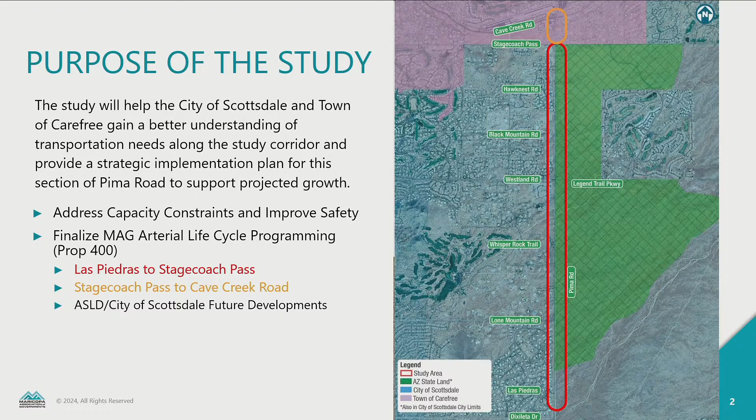Another driving factor on why we're doing this study at the request of the city of Scottsdale and the town of Carefree is that both agencies have MAG Prop 400 Arterial Lifecycle Program funding for this corridor. So with Prop 400 coming to an end, we need to move forward with programming the funds and getting this project constructed.

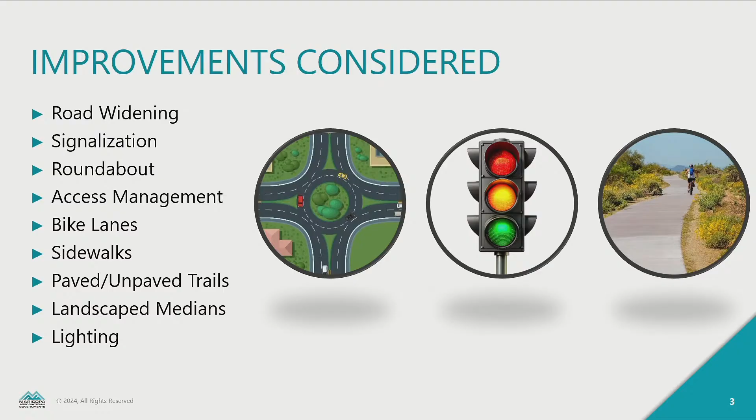So this project looked at a variety of different things. One of them was definitely road widening. Today the road is one lane in each direction, for those of you who are not familiar with this section of Pima Road. We looked at signalizing intersections, also looking at roundabouts, in addition to adding bike lanes, sidewalks, and access management.

As I stated earlier, this is the last section of Pima Road to be studied or widened. As you can see down by the Loop 101, it's a 6-lane arterial with a median today, and as you go further to the north, it transitions to a 4-lane arterial with median. I'll let out the surprise: one of our recommendations is to continue with that trend and propose a 4-lane arterial with median.

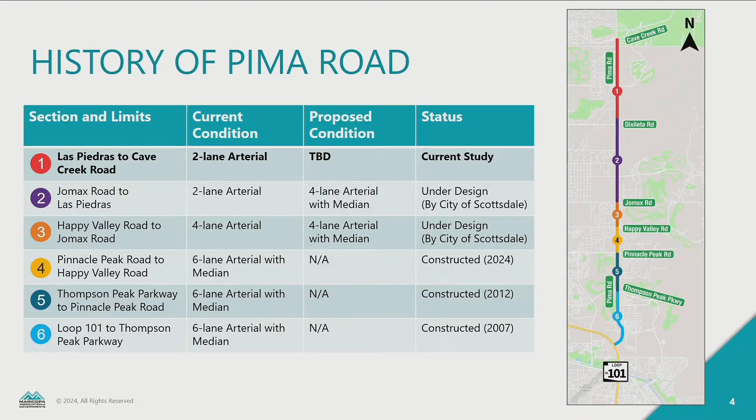So safety is a focus of ours on this study. We heard this from the town of Carefree and the city of Scottsdale. There were over 70 crashes in a 5-year period along this section of roadway. 57% of the accidents occurred between Stagecoach Pass and Cave Creek Road at the end of the line, and that's how I like to talk about this part of Pima Road.

This corridor has variable speed limits, as high as 50 miles an hour, all the way down to 35 miles an hour. The further north you go, the speed slowly starts to drop and decrease, and I think this is one of the reasons why we're having accidents in this location. Plus it's a 2-lane road, and there's not a lot of street lighting in the area.

And so I think we've seen a lot of accidents occurring, especially angled and rear end accidents. Unfortunately, we did have a traffic fatality at Cave Creek Road and Pima. So one of our objectives of this study was to slow traffic down as Pima Road comes to the end of the line at the north.

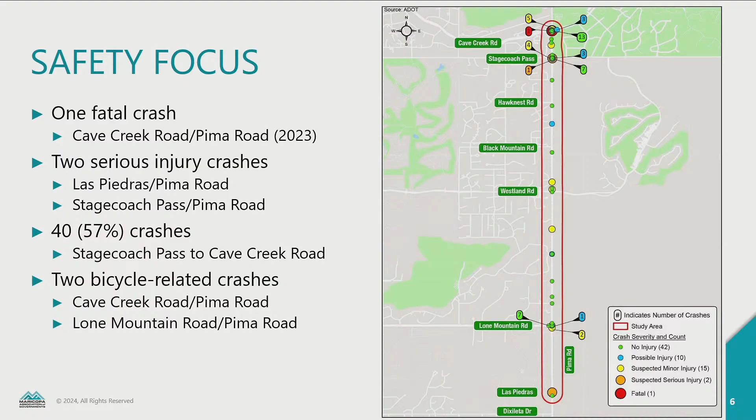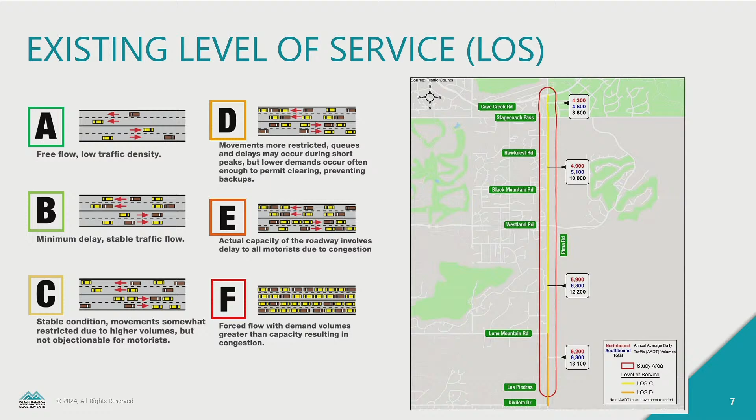So currently today, the roadway is a 2-lane road, 1 lane each direction. It's actually operating at level of service C and D right now, which is pretty fantastic. But as we move into the future, in the year 2035, the corridor starts to fail with all the anticipated growth that's supposed to occur in this area. And by 2050, everything operates at level of service F.

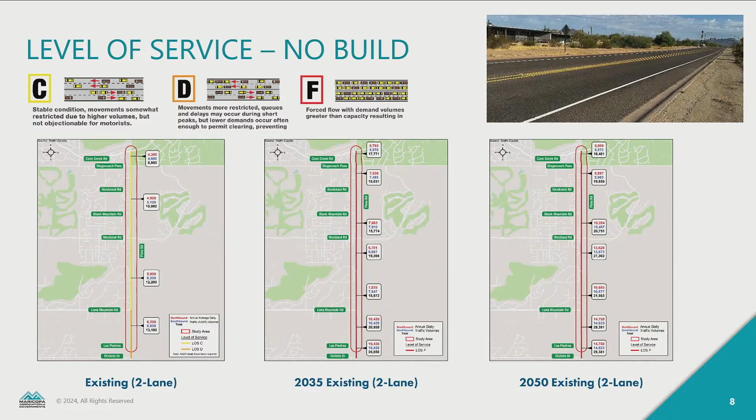We held our first public meeting. After we do any study, we collect a lot of data and start to analyze the system. But this first public meeting was held on November 11th, and we really wanted to reach out to the residents along this corridor to better understand the transportation issues in the area.

Our consultant team, one of them actually lives up there, but I don't live up there as the MAG PM, so I really rely on the residents to sit down. We roll out roll plot maps, we start talking to them about the issues they're witnessing on a daily basis, but we also ask them about transportation opportunities they would like to see implemented in this area.

So we had a great turnout, about 50 residents. This meeting was held at the Town of Carefree Council Chambers. 63 comments were collected on the roll plot.

A lot of the issues focused on safety issues at intersections and driveways, adding signals and roundabouts to slow traffic down in the corridor, increasing the number of lanes to manage traffic, and comments about managing the impact of new residential developments and ensuring careful construction phasing.

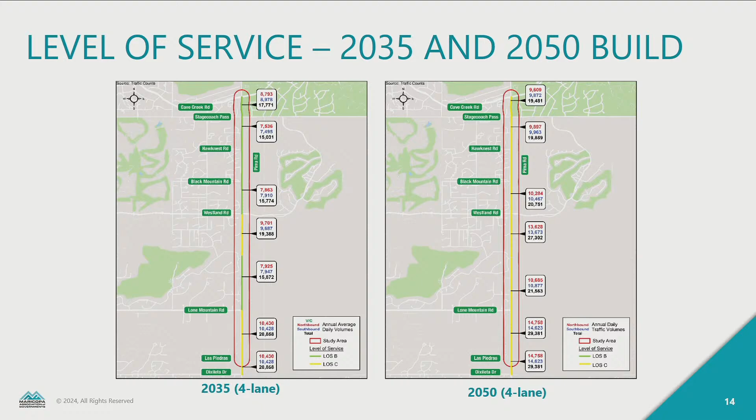Now we're going to transition into the intersection recommendations, starting at Pima Road and Lone Mountain Road. This is an existing signalized intersection. We looked at it in the year 2035 and 2050 as a signal, and it operates at level of service B and C. As a multi-lane roundabout, it's level of service A in 2035 and level of service F in 2050.

A roundabout at this location just would not work with certain movements; they're very heavy, so it makes more sense to keep the signal in place. It's an existing signal, and 92% of the residents voted in favor of the signalized intersection.

The intersection of Westland Road and Legend Trail Parkway is also an existing signalized intersection. The signal operates at level of service B and C in 2035 and 2050, and again level of service A and F in 2035 and 2050 for the roundabout analysis. Residents voted on this one and provided their comments, and 87% were in favor of the signalized intersection, so it's our recommendation that it stays a signal.

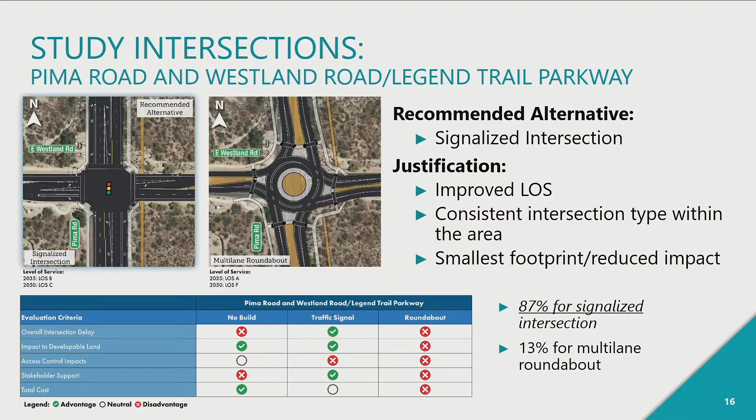At the Stagecoach Pass intersection, it's currently signalized or stop-controlled on the east and west side, and uncontrolled north-south. We looked at a signal and a roundabout for this location. In both 2035 and 2050, both concepts operated very well at level of service A. We're recommending we go with a traffic signal, since the roundabout would take up more right-of-way, cost more money, and had more stakeholder support for the signalized option.

Moving north as we go into the Town of Carefree, this intersection has experienced a lot of safety issues — a lot of accidents, and we've had a fatality there. We get a lot of boating traffic or recreational vehicles heading out to Bartlett Lake in this area. So we analyzed it for a signal and a roundabout. The roundabout outperformed the signal with level of service A in both 2035 and 2050, while the signal operated at level of service B and C.

Our recommendation is to propose a multi-lane roundabout at this location. I did present to the town council last week, and they were in favor of this recommendation.

As you can see, the public voted 53% for signalized intersection and 47% for multi-lane roundabout. I had a question asked of the people attending the meeting: do we know who were residents of Scottsdale or residents of Carefree? We didn't ask or collect that information. We looked at this as a regional facility and wanted to bring the public in to comment.

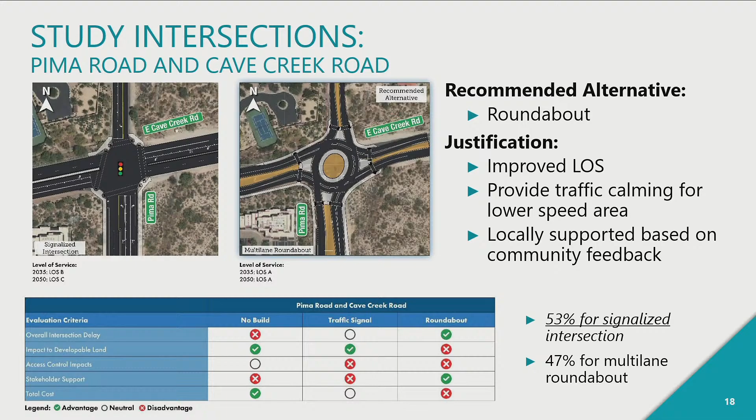So the cost estimate for this entire corridor, including signals and roundabouts, and any additional right-of-way that we need, is around $88.7 million.

Segment 4 starts 900 feet south of Stagecoach, so that starts in the city of Scottsdale and then transitions into the town of Carefree. We broke that cost out where the town of Carefree would be responsible for $10.4 million and city of Scottsdale $5.8 million for that last section.

So the next steps, we're going to work with the town of Carefree, the city of Scottsdale, and our consultant group. We're going to finalize the recommendations, and then we're also going to pull together a MAG Arterial Lifecycle Program working group. We'll bring in Patrick Stone and his team to talk about the regional funding we have for this project and figure out a path forward.

Chair Miller, that completes my presentation, and I'm happy to answer any questions.

Thank you, Mr. Stowe. Commissioners, do you have any questions, comments? Commissioner Pankwitz, I have a question.

At the beginning of the presentation, you mentioned the east side of the road is going to go to state auction. Can you explain how that works? Does it just go to the highest bidder regardless of the land use they're going to place there? And also, will that development provide any of the right-of-way or help with that?

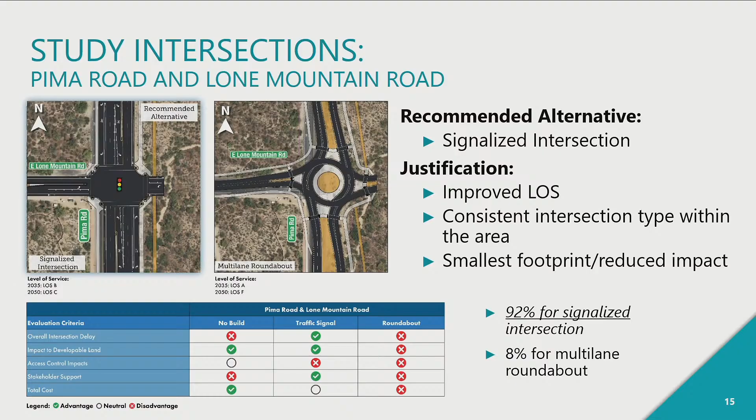There you go. I'm not sure, I don't understand why the roundabout got negative in all categories. Well, I think a large percentage of it was that Lone Mountain today is a T intersection, so when the new state lands comes in, it'll create a four-legged intersection. There'll be a lot more traffic entering the intersection, and so based on the different movements, it would fail from an operations standpoint. And the roundabout would take significantly more right-of-way in this area as well.

Well, I concur with the Commissioner's comments about safety. I don't think you evaluated safety enough, that it's a priority in our transportation action plan. And the community vote is very, very important, there's no question about that. But I didn't see any emphasis on safety in this report. A lot of our recommendations were also based on stakeholder support, from the city of Scottsdale itself. This was an existing signal out there today, and so the recommendation was to keep it the same moving forward in the future. It outweighed the impacts of a potential roundabout at that location.

Could you go to the stagecoach slide, please? Yes. As you mentioned, we have a 10-mile-an-hour speed limit drop. So I do believe we need some traffic calming in there, it would seem. Yeah, and that's why we looked at the roundabout concept at Cave Creek Road to help slow people down. It transitions, I think at this point, from like 45 miles an hour and then goes to 35 in this area. There's also different minor improvements we're recommending to help slow traffic down, like for the stop-controlled intersections, having flashing reds or flashing stop signs in the area. But again, this recommendation is based on the fact that Stagecoach Pass also passed a signal warrant analysis by the city of Scottsdale, I think in 2016 and 2023.

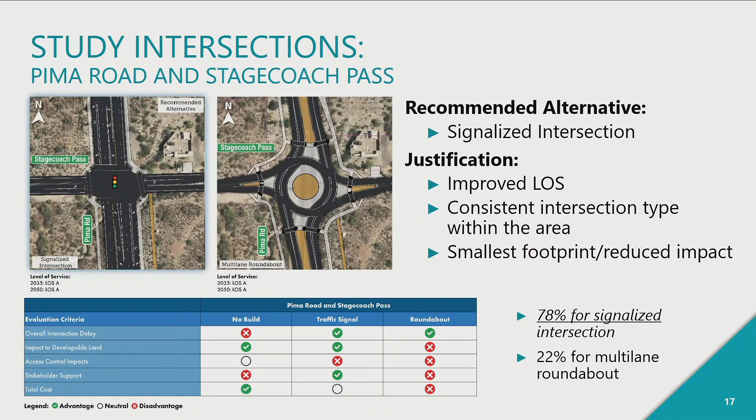Vice Chair Wilcoxon, we actually did have a roundabout expert help us out with this corridor study out of Colorado, and I believe they did use a multi-lane roundabout, not a turbo roundabout, for the analysis. Your slide is just off. Well, the concept shown here, I believe they talked about this being more of a buffer design. We have literature on that as well—I believe it's becoming more commonplace, like a modern roundabout feature. We can definitely send you more information on that. I don't personally have all the information, but I believe this was not intended to be a turbo roundabout.

Okay, and I work with Kimley Horn, and your Colorado expert is probably on our ICE committee and probably giving us the same information. So I'm concerned that safety and speed in this case, to Commissioner Marmon's point, has not been considered, and that we're asking the wrong questions.

That's all I have. Commissioner Kafdile.

I'm going to ask much less technical questions than my previous two commissioner colleagues, although I echo all their concerns about safety—that's normally my primary concern. On slide 13, there were a lot of initialisms used, and I didn't recognize all of them. I was wondering if you could go through what those are. Like, I know SUP would be shared use path, and RW is right of way. What's SWK?

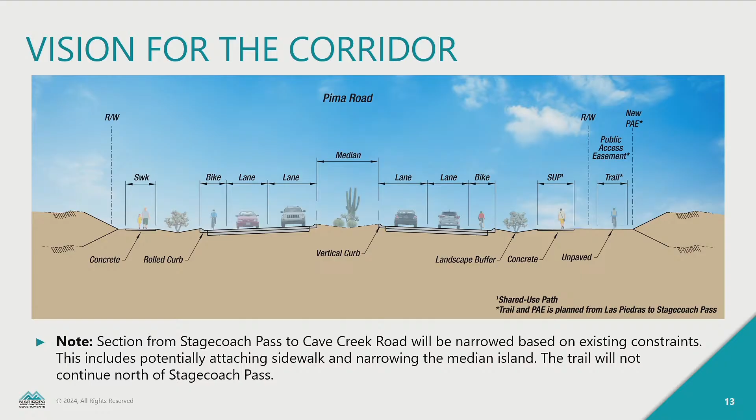Commissioner, if I go from left to right here, we've got right-of-way (R/W), then SWK, the sidewalk. In this case, the typical setup has been an 8-foot sidewalk on the west side. When we get to the other side, we've got a shared use path, typically 10 feet, consistent throughout the corridor. Then we have PAE, the public access easement right there. I think I've caught them all. Everything else is pretty self-explanatory.

A question on sidewalk versus shared use path: is it just the width of it? So a sidewalk is 8 feet and a shared use path is 10 feet?

I'll be happy to take one. Thank you, Chair Miller and Commissioner Kafdile. Throughout this entire corridor, yes, it's just width. On the west side is our standard 6-foot sidewalk, and on the east side is our standard multi-use path, about 10 to 12 feet. We will stripe the multi-use path so we see two different directions being used for that. But that's going to be consistent throughout the whole corridor we're doing, sidewalk on one side and multi-use path on the other.

Thank you, Chair Miller. In terms of the resident feedback you received, I'm less familiar with this part of town, but looking at your map, it looks like it's not particularly inhabited. Are there many residents living right in that corridor, and how does that relate to these 5,000 homes bringing 10 to 15,000 new residents? How does that comparison work number-wise?

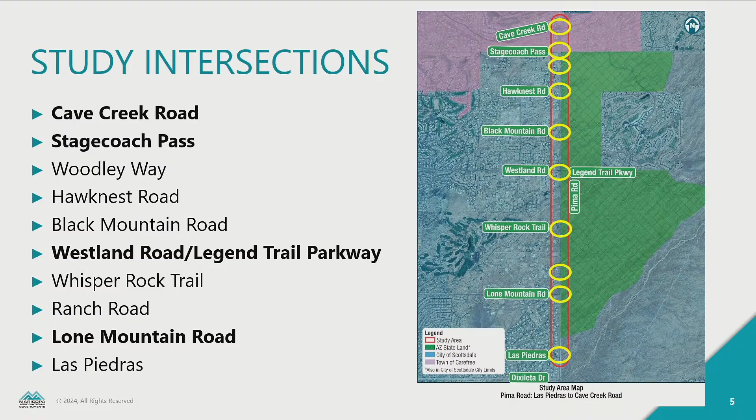Yeah, so you can see on the map, on the west side it's pretty well developed. There's communities from Stagecoach Pass all the way down. There is a development on the east side that's out there currently today. A lot of the residents were very surprised about the number of homes coming in. They thought it was part of the Scottsdale Preserve out here, to be quite honest. So they were more in shock about the amount of growth occurring than us widening the roadway. They were absolutely in support of us adding additional lanes and adding the roundabout at Cave Creek Road and the signals at the other intersections.

Very positive feedback. Okay, well I would just echo the safety concerns of other commissioners, and keeping in mind those future residents as well. Hopefully families and people that would live there, safety being top of mind for them, for their neighborhood.

Absolutely. Thank you. Chair Miller and Transportation Commission, I'd like to comment for a second that the task we gave Kimley Horn and MAG was to evaluate widening of the roadway. It's been on the books to widen this to 4 lanes for quite a while now, to get us a decent cost estimate and look at what kind of right-of-way acquisition and drainage improvements we might need, as well as what impact it would have on the level of service. We've definitely heard your emphasis on safety, and we'll make sure we address that and bring that to this project moving forward. This is just a PA and a cost estimate, so we will give heightened awareness to safety on this corridor and see how we can improve that in the design moving forward.

Thank you, I have a few questions. Remind me how long this corridor is? 4.1 miles, with 10 potentially signalized intersections.

No, Madam Chair, currently today there's only 2 signalized intersections. The rest are just access to communities, so stop controlled. We're going to recommend the roundabout at Cave Creek Road and Stagecoach Pass, so there'll be 4 intersections in the future that are not stop controlled. All the other ones, only the ones highlighted in bold will be either a signal or a roundabout. So, Chairman, not all the little round circles — the only 2 getting added are Stagecoach and Cave Creek.

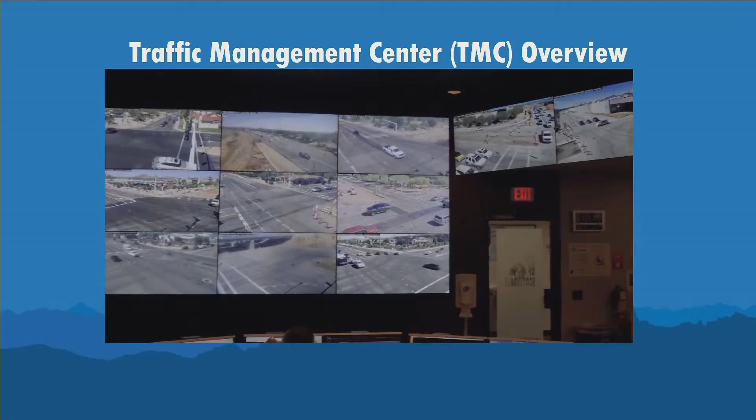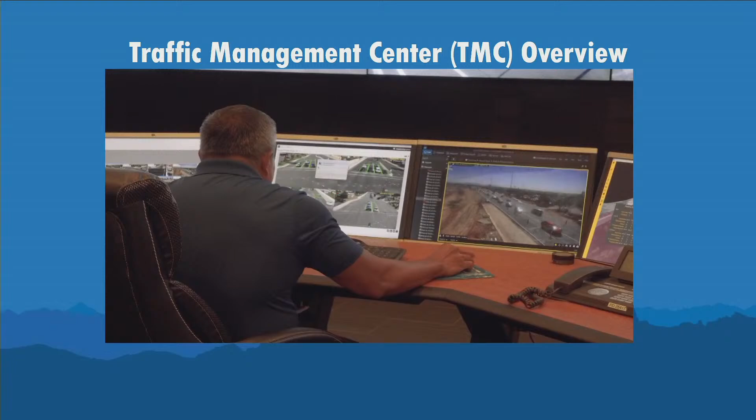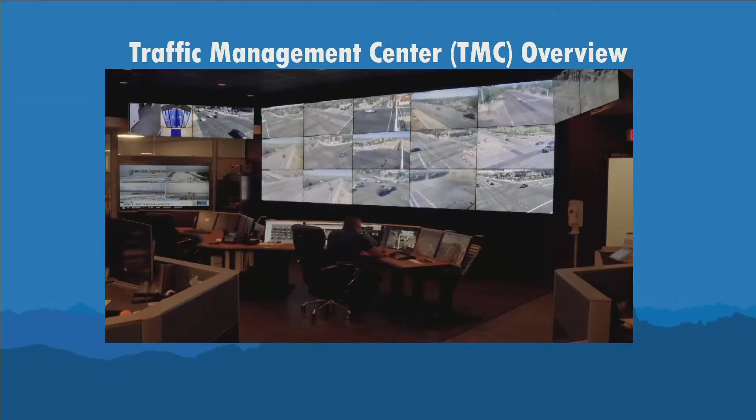Scottsdale's Traffic Management Center, or TMC, launched in 1993 with just one camera to help ease traffic during the Phoenix Open. Today, it's a cutting-edge operation managing traffic at over 300 intersections and more than 14,000 streetlights across the city. Staffed by traffic engineers, analysts, and technicians, the TMC's essential functions include live traffic monitoring, signal timing, incident response, managing roadway restrictions, coordinating special events, and delivering real-time traveler info. With 226 miles of fiber optics and over 200 video detection systems, the TMC makes real-time adjustments to minimize traffic congestion. Signal timing is updated based on thorough analysis and advanced modeling tools, tailored to each intersection's traffic volumes and roadway design, ensuring safe and efficient operations. Signal timing is adjusted daily to respond to changing traffic patterns, construction, and big events. Smart, responsive, and ready, Scottsdale's TMC keeps your commute safer, faster, and more efficient.

That's a good segue of what I'm presenting: left-turn signals, the lead lag, and the signal change clearance interval. We'll talk about the signal basics, the lead lag operations, the surrounding agency comparison, the signal clearance times, and the staff recommendation at the end.

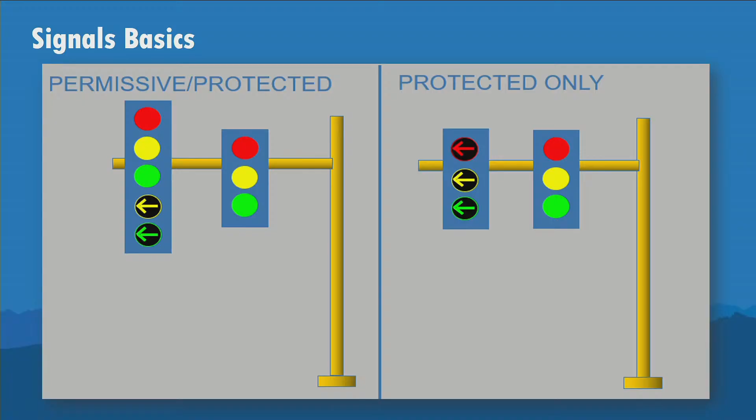Starting out with the basics, this is what all drivers will see at the traffic signal. On the left is an option of permissive protected signal indications, and on the right is protected only. I'm going to go over more details with those.

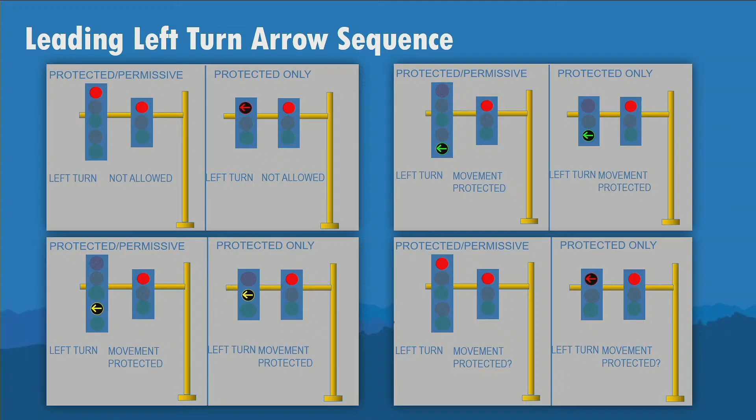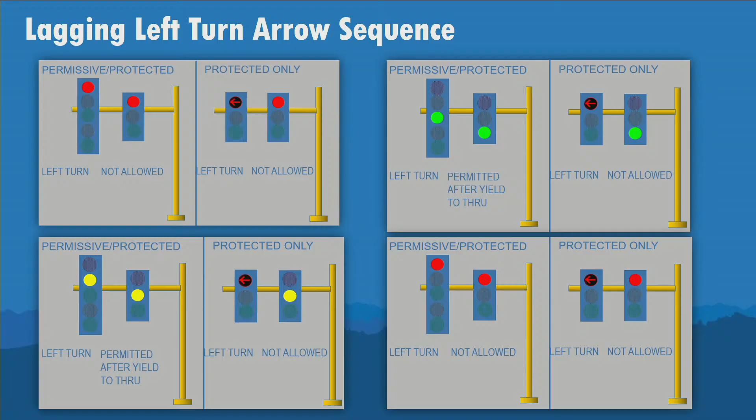If we have the leading left-turn arrow sequence, from top to bottom and to the right, you'll see the left-turn arrow on first if it's leading, or the green balls starting first for leading through. If it's lagging, the through starts first, and the left-turn arrow is at the end. So basically three different left-turn operations.

We have the permitted, which is very efficient but requires drivers to pick a gap against approaching traffic. The protected, in the middle, is a very safe movement but creates a lot of delay at the intersection. The last one is a combination of protected and permissive, which is a compromise of safety and efficiency.

So the NCHRP, the National Cooperative Highway Research Program, published a report. Report 493 kind of indicated that since 2003, the majority, more than 80% of agencies around the nation tend to use leading when they have permissive protected movements. We have about 10% lagging, and then 6% lead-lag, which depends on the operations.

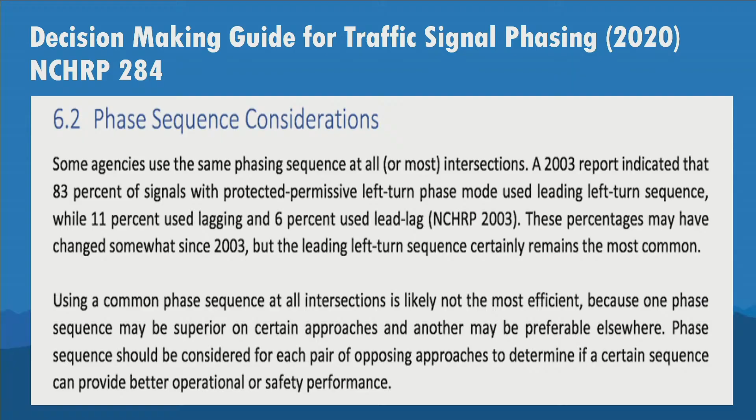Fast forward to today, the majority is still like that. It's going to be a big number still leading at most intersections. We also looked at different research reports, and at the end, similar crash rates for leading and lagging, we don't see a big difference. It's not really statistical evidence of a difference if it's leading or lagging. It depends on drivers' behavior.

So consideration is based on multiple factors, such as safety, efficiency, consistency, and also resources. This is a comparison of the agencies around us. We have 10 agencies that reported back what they're doing. I'm kind of focused on the top 3, lead at all directions.

Starting out with Scottsdale, we have more than 300 signals with 5% leading. Chandler has about 30%. Gilbert recently changed, 5 to 7 years ago, they had a lot of lagging but recently changed to more than 95% leading. MCDOT is 100%. Mesa is about 90%. Peoria about 50%. Phoenix I think is 85%. Surprise is 91%.

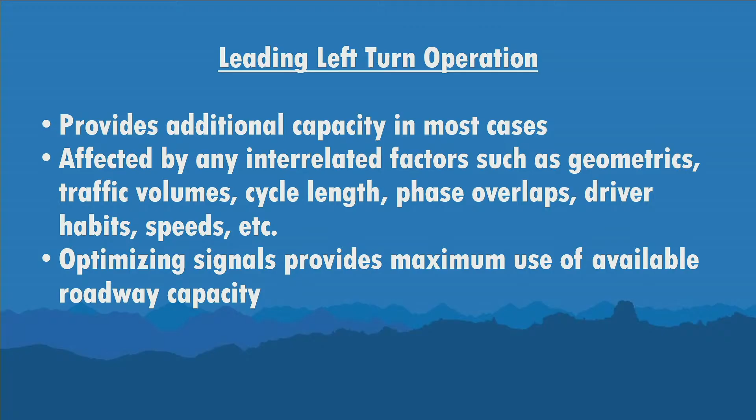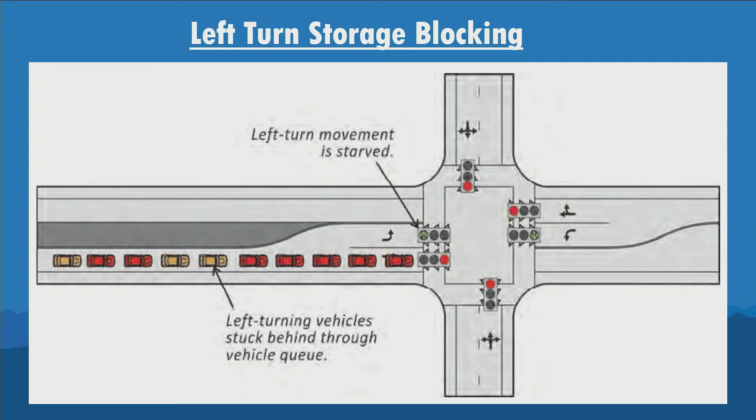This one is actually the opposite of what we just showed. If we were to lead at this location, you see how the left-hand arrow is on, but there's no traffic because the people that wanted to make a left are being blocked by the through movement. So in this situation, we should lag this location, and there's a video describing that.

This location is at Indian School and 68. I think you guys are very familiar with this, we have a few projects at this location. Same thing, on the left is the traffic signal system, and the CCTV describing the same thing we do, with descriptions for northbound, southbound, east, west. For this video we want to focus on this one right here.

There's high through traffic volume blocking the left-hand lane. So at this location we lag the left-hand lane, we clear the through traffic out, and then the left-handers are coming in. This is actually showing the same thing; right now it's showing green arrows, meaning the north-south through movements are on, and it's turning yellow.

And now the left turn is on, as these people here. So that's kind of the reason why we don't just do all lead or all lag.

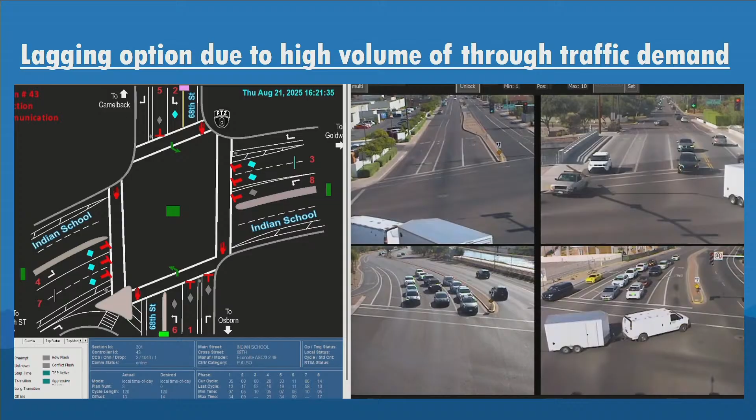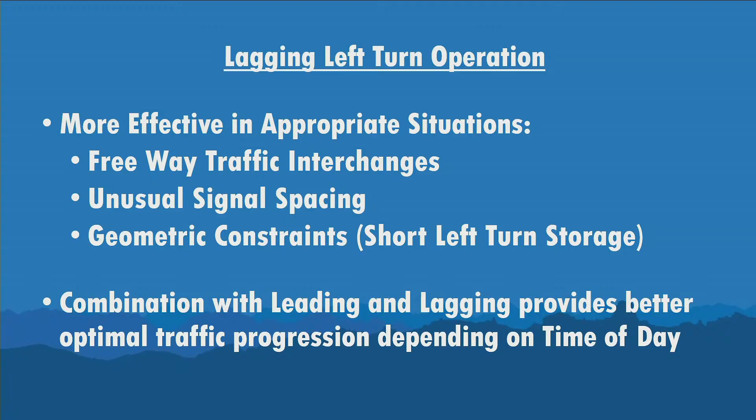For the lagging operation, a lot of these situations apply for the freeway traffic interchange because of the limited storage area, the spacing of the signals, and so on. The combination of leading and lagging provides better optimization for the entire corridor, and it depends on the time of day.

I think there was a slide that mentioned the yellow trap. I want to save this so we can talk about it.

I guess when you get nervous, you just kind of make a left turn in front of a lot of vehicles, and that's what happened.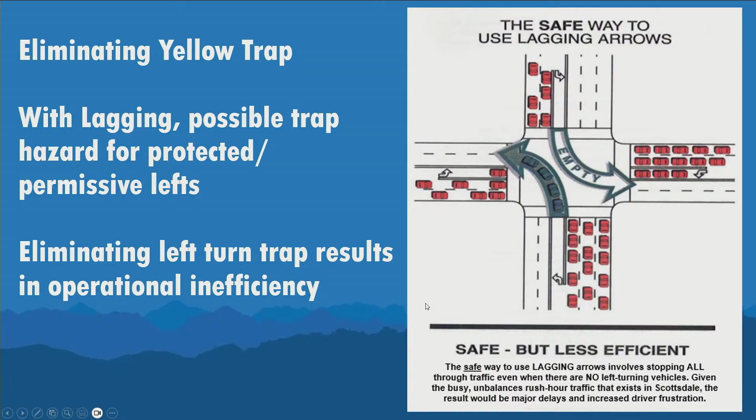In summary, leading or lagging is not a one-size-fits-all. We're trying to be consistent within the city and also the agencies around us, but if traffic engineers have the flexibility to pick and choose which operation is probably the best option for us, based on thorough analysis, optimal throughput, safety, and available resources, we're able to improve traffic operations for the entire city.

So that's one topic. We're going to move on to the next one: dilemma zone, or now they call it decision zone. The yellow area is what we're going to focus on. If you're not familiar, as you're approaching the intersection and the light is turning yellow, in the proper zone you should have enough time to make it through the intersection. The yellow area is where people are wondering, should I stop? I'll have more information on this.

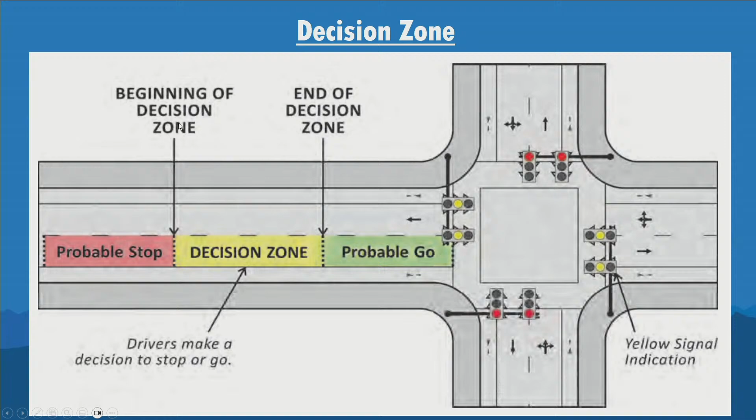Look at this right here, the yellow area. This is the beginning zone, and this is actually the end. There's more information about that.

We have roughly about 5.5 seconds from the beginning of the zone for drivers to actually cross. If you're at the end, you have less time, of course, because you're closer to the intersection—about 2.5 seconds. This is all based on the posted speed limit, 35, 40, and so on.

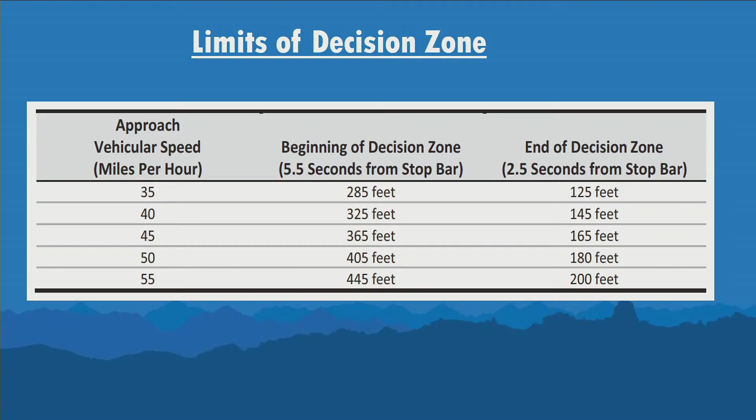Going back to the signal change, clearance interval, we have two parameters: the yellow change and the red change. If we have too much time or too little time, we go back to that dilemma zone we discussed. People don't have enough time to safely cross the intersection, and crashes may occur.

All of this depends on drivers' behavior, action, perception, and reaction, so the zone will differ depending on who the drivers are. Similarly, with the red clearance, if it's too short there's a potential conflict with the other phase; if it's too long, it's a waste of time at the intersection. It also depends on how big your vehicle is—a passenger car versus a trailer.

According to the MUTCD, based on speed, at 25 miles per hour the yellow time should be about 3 seconds, 30 should be about 3.2, 35 is about 3.6, and so on.

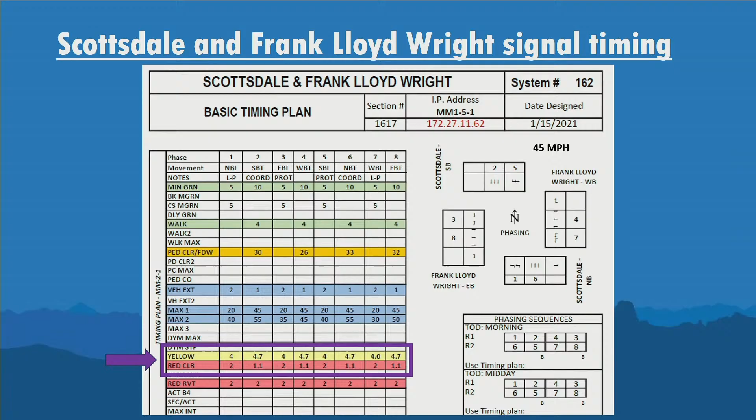Let me go back to this one right here. At 45 miles per hour, MUTCD recommends a minimum of 4.3 seconds, and we actually meet or exceed that with 4.7 seconds at this location.

Let's look at the other agencies' standard of practice. The documents we kind of reference are the ITE guidelines, the signal timing manual from 2015, and the AZTech white paper.

Currently there are 2 agencies piloting an increase in yellow time. Whatever the MUTCD recommended, they're trying to increase more, but they're still piloting projects. One agency can be done in 2026, the other one in 2028.

There's a study in California that found increasing clearance interval greater than the ITE guidelines would increase the number of angle collisions, which is one of the most severe collision types. The overall collisions would slightly decrease, but that's probably because of the decrease in rear-end collisions, which is the least severe collision type.

So the guidelines I mentioned are the ITE guidelines and also the AZTech white paper. About 5 years ago, all of the agencies — I think 13 agencies — were involved in this white paper, providing the formulas for how they come up with the yellow and red times, and also the pedestrian time.

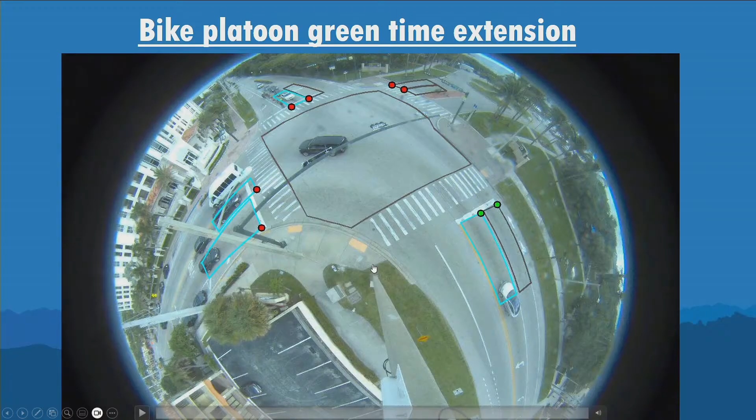That's one video, and another one is for a platoon of bicyclists. Focus on this one right here — when the light is green, there's a lot of pedestrians or bicyclists going through. But once they're in the box, you'll see that even vehicles don't light up the box — only the bicyclists light it up, extending the time until the last bicyclist is out of the box, then it turns off.

So that's the technology we are testing. Instead of the traditional approach of adding 1 or 2 seconds to the yellow time, we can have something like this, and it's only used on an as-needed basis. If there are bicyclists, we detect them and extend the time, giving them enough time to actually go through the intersection.

Similarly, we have a video — it's still kind of beta testing — about the dilemma zone. This is the dilemma zone detection zone that we have. If there's a vehicle over here, we extend the green light for that movement. I'm going to run the video.

As you can see right here, there are a few vehicles going through. The goal is to try to extend the time when people are there, not every cycle of the traffic signal. There's a lot of movement and information here, but you can see if there's no vehicle there, it's not detecting it. That's what we're testing.

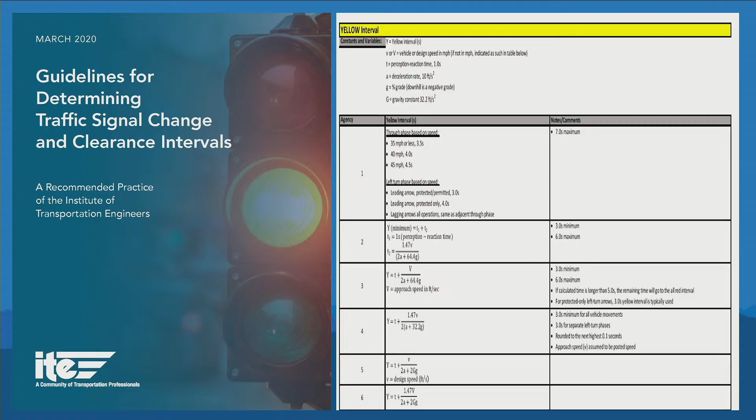Chair Miller, Commissioner, those are very good questions. So let's start with the surrounding agencies. The white paper that I showed, I think a lot of agencies are doing very similar things. I have the whole report if you want to take a look at it, but this is actually a comparison, we have formulas. If you do the math, the numbers are very similar, except for the two agencies I mentioned that are piloting increasing the yellow time because they were not doing enough. So that's why they're increasing it. They're still testing. So that's for the surrounding agencies, the valley comparison.

As far as nationwide, we have not looked into that. But if you use this document, the ITE guidelines and also the MUTCD, I would assume the other agencies are doing the same thing. I would say very similar to what everybody else is doing in the nation.

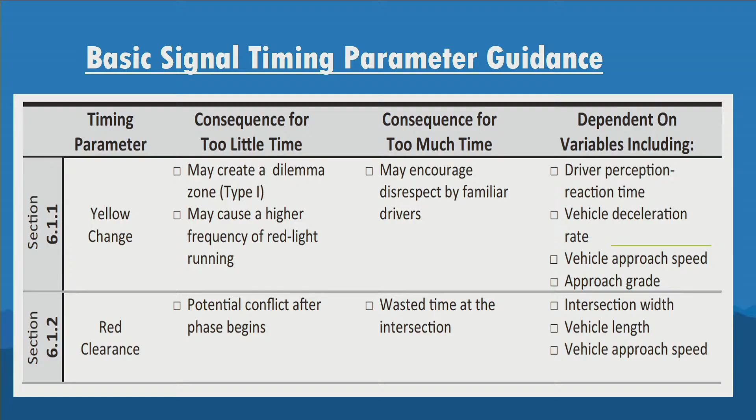You want me to go back? I think you kind of mentioned about the 4 seconds. This slide kind of shows, if we have too little, it's not safe. If we have too much, people kind of take advantage of it, and it's inefficient. So that's kind of what you mentioned. What is the best? And the answer is the best probably depends on each driver. But as far as we meet or exceed the requirement, I think that's probably good. And what was another question you have? I think that was the main question.

Okay, that was the main question, and I think I heard you say that the length, the way we have with our modern system, the amount of time or lagging and leading intervals, does change throughout the day depending. So maybe there's a lot of traffic moving north at the start of the day, and a lot of traffic moving south at the end of the day, so our leading lagging will switch. In the morning it might be leading then lagging, and then lagging with leading going the other direction. Was that correct? That's correct, sir. It depends on the corridor.

And then the first presentation you had about why we would want a leading there, looking at the video, you said, see, look, this starts to get backed up. Yeah, this one here, where you said this starts to get backed up, but when I was watching the video, there were no other drivers that showed up, so nobody ended up getting blocked or anything like that.

Your point was made. I just noticed that it didn't really matter whether it was leading or lagging because nobody got blocked, so nobody was inconvenienced either way at that location. That was just one location, but we have a busier area that would show exactly that, but at least we got our points across.

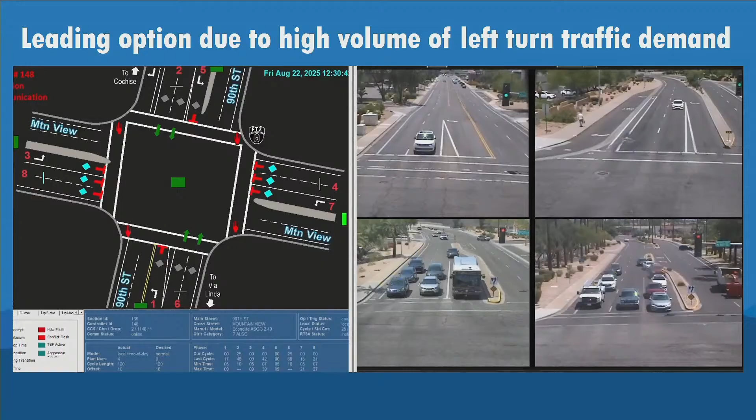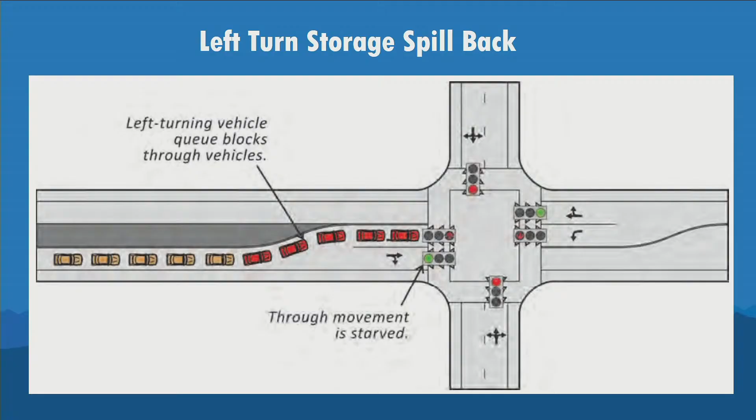This slide right here, can we go to the lagging slide, the one right after it please? Right there, no go back one. At what point do you say we need to restripe or change that median to get more capacity out there, where that left turn is overflowing?

Chair Miller. Commissioner Marmon, I think that's a very good question. One of the slides I mentioned about resources, what's the best and cheapest way to actually solve the problem. We would probably go with the operational solution first, looking at how we can move traffic without modifying the median, because that option normally costs a lot more. So widening is an option, but it's probably number 2 or 3, actually. But in some areas we have to do it because we tried the operational solution and it doesn't work.

For example, at Hayden and some other locations, we actually widened and extended the left turn lane. Same thing with Shea widening that was just recently completed. So we always look for the operational option first and then move on to the next options. Okay, thank you. Could you go to the yellow trap slide please?

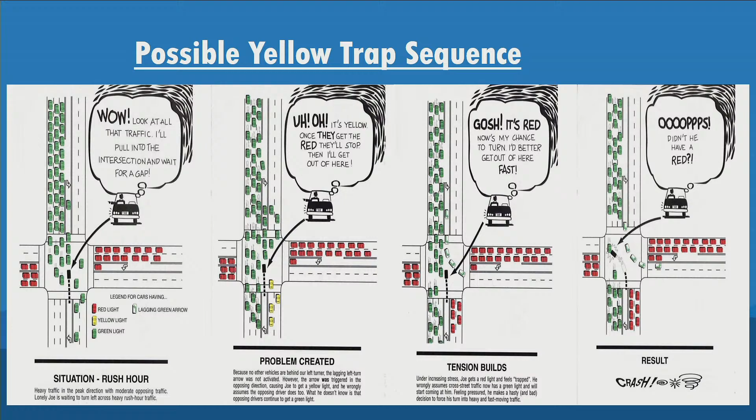Okay, the car in question was on the detector and then moved off. Why doesn't the detector remember that there was a car there and go through the whole cycle knowing there was a car there, instead of forgetting?

Chair Miller, Commissioner Marmon, that's a very good question, and it goes back to efficiency. Normally we have an option to lock a driver if they pass through, but if we lock it and that person was able to actually make a left through a permissive phase, we'd be holding the left turn arrow for a few seconds for nobody. So we have that option at some locations, but most of the time if the driver left the detection zone for about 2 or 3 seconds, it deactivates the detection area. It's about efficiency that we're trying to do.

Thank you. I guess my last question is about modeling the system. Let's say there was an accident somewhere blocking 2 lanes. Do you have a way of modeling the overflow and adjusting signals in real time to keep the traffic moving?

Yes we do. I'm not sure if you were at the TMC several months ago, we demonstrated that. If there's an incident and traffic is backing up a quarter mile or longer, we can actually extend it for as long as you want, like 3 minutes - I've done 3 minutes before - to get rid of the backup and avoid creating secondary crashes. So things like that we can do in real time. Okay, thank you.

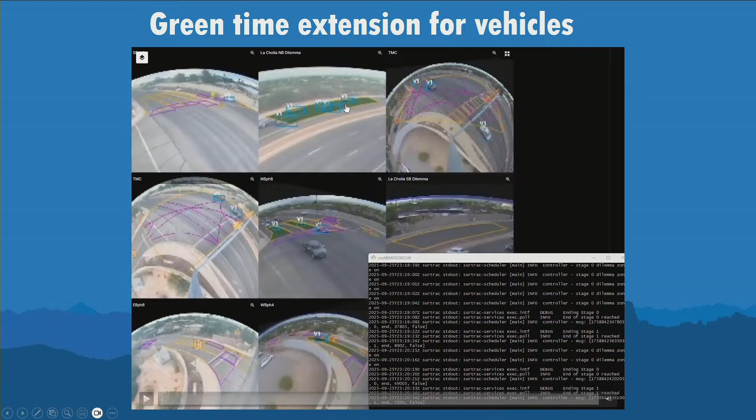So red light camera, PD is in charge of that, so we don't venture into that area, but we can always discuss with that. This is very similar to what I'm presenting here, that detection zone. If somebody's in this zone and we know that they're not gonna stop, we extend the green for them to safely get through the intersection and hold the other directions.

Very similar approach to what we are testing here. So when I mentioned the ITS technology, we don't just look at one - there's video detection system, LiDAR detection system, and infrared thermal imaging detection system. We're looking at all of those technologies to see what's best for us, and then we implement it.

Sure, and I appreciate that, and I would just say that while it's great you have that ability, you're kind of rewarding somebody who is breaking the law by giving them more green time. I don't support that. I support a system that penalizes people who take advantage, because people do learn pretty quickly that, oh, this intersection, I can push the yellow or push the green, based on past experience. We know that is happening. So I guess I would suggest that you look at the dilemma zone red light camera systems, which you're halfway there.

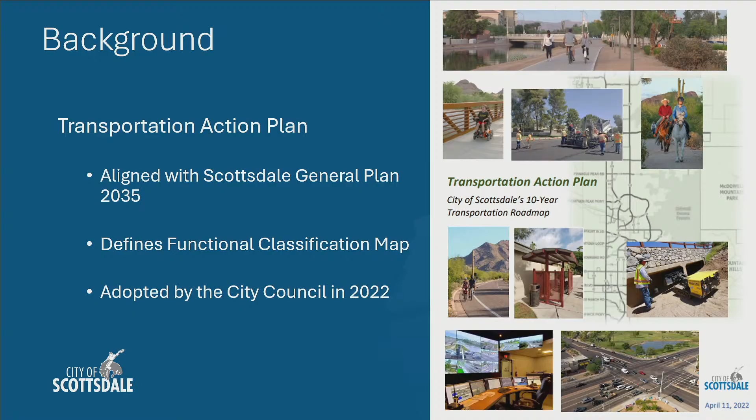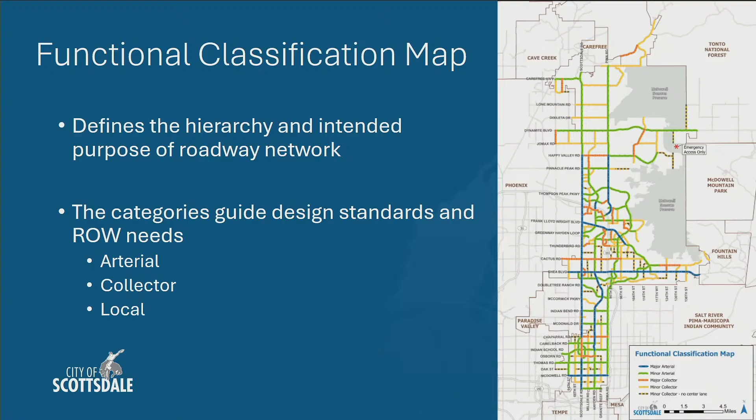The functional classification map defines the hierarchy or intended purpose of all of our major roadways. The categories guide design standards and right-of-way needs. As MAG showed earlier in the previous presentation, we have our standards in our design standards manual, and those directly relate to the functional classification map. So as we define these roadways as an arterial, collector, or local, they directly relate back to what our standard cross sections are, as well as the right-of-way we need in order to build those roadways.

The proposed amendments: 78th Street, Shea Boulevard to Mountain View Road, as a minor collector going to a local road. Sam Taylor, our principal traffic engineer, presented on the neighborhood submitting a petition for that, and we're looking to make a formal recommendation to council for that functional classification change. Additionally, we have Chauncey Lane over in the Air Park between Scottsdale Road and future Miller Road, changing that from a local road to a minor collector.

So, 78th Street reclassification from a minor collector to a local. It was a resident petition. Persistent speeding concerns were the direct reason for this change. Traffic analysis and a neighborhood meeting showed support for this change, that we would like to make a change to the speed limit and also create more traffic calming along this corridor.

So look to make this change to a local and then make that road more adhere to local conditions. Here's the map again shown last month, but again, that 78th Street coming down from Shea to Mountain View would drop off as that yellow line as a minor collector, turn into a local road, and then drop the speed limit down to 25 miles an hour.

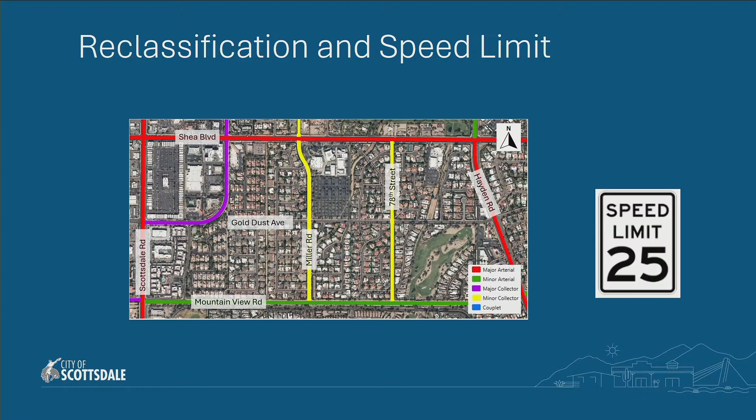I'm blanking on the roadway there, I think it's 76th. 76th has an existing roundabout, and then over at Scottsdale has an existing signal. So having that connection go through to Miller and provide an additional connection.

The proposal of that roadway supports a minor collector roadway and supports the function of that. Most importantly, it relieves Princess Boulevard as development grows throughout this area. So we'll have Mayo and Princess taking the brunt of the traffic off of Miller if we do not provide Chauncey as a minor collector through this area. So that would be to make that official as a minor collector in the functional classification.

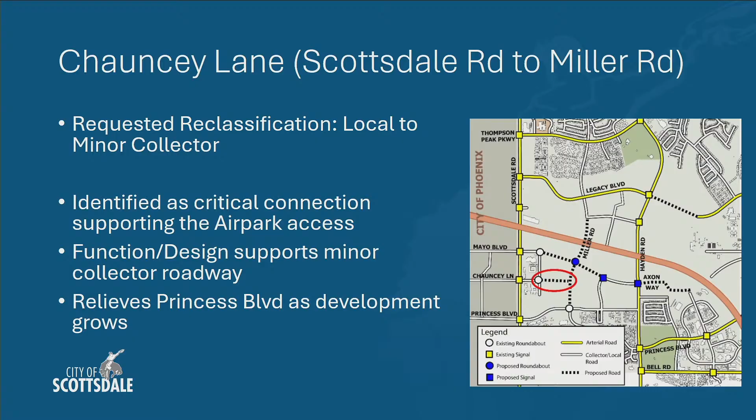Next steps: take Transportation Commission's recommendation right here, and then a City Council report to City Council for formal adoption of the amendments to the Transportation Action Plan, and then publish updated maps and tables on the city website. So any questions or comments on the proposed action?

Thank you. Any questions? Commissioner Pankowitz: So you mentioned 78th Street came from a neighborhood petition. Where did Chauncey Lane, the recommended change, come from? Staff's review of the area.

We have a very undeveloped area up here where there's a lot of proposed roads. As we are working with private development and working on this area, we saw a condition in our functional classification that we needed to fix, which was identifying this as a minor collector that would connect to Miller.

Okay, my concern is the 78th Street condition probably exists along a lot of streets in Scottsdale, and I'm just concerned—I respect the neighbors for coming together and asking for this—but my concern is how are we spreading the equity to all residents in Scottsdale? So people that have this condition and maybe don't have the time to come here and request or gather together neighbors also get that same opportunity.